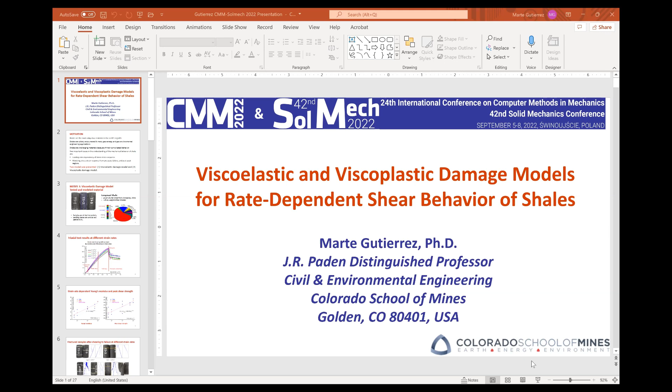My presentation is viscoelastic and viscoplastic damage models for rate-dependent shear behavior of shales. It's a little bit changed in the title from the abstract that I've said. Okay, what are the motivations for my presentation?

Number one is that shales are the most common material on the surface of the Earth. Okay, it's found everywhere. In fact, it's widely encountered in many geoenergy and geoenvironmental applications. At the same time, shales are very challenging materials. They exhibit very complicated, very multifaceted behavior.

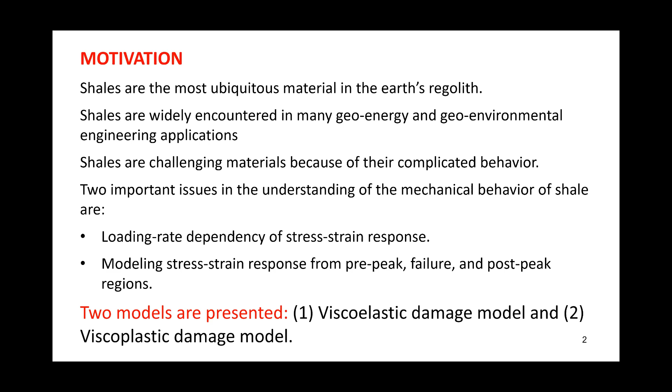Two of the important issues in the understanding of mechanical behavior of shales are the loading rate dependency of the stress-strain response and modeling of stress-strain response that spans the pre-peak, failure, and post-failure regions. So these are the focus of my presentation. And to address these challenges in understanding, I will be presenting two models: a viscoelastic damage model, which is really very simple, and a viscoplastic damage model. And you'll see why there are two models that are being presented.

So for model one, let me present first the results of triaxial tests that were conducted on a shale from China, which is found in Chongqing. It's a lower Silurian shale. Based on mineralogy, 73% of the mineral content are brittle, so it's expected to be a very brittle material. The main component, 55.51% by weight, is quartz, which is a very brittle material.

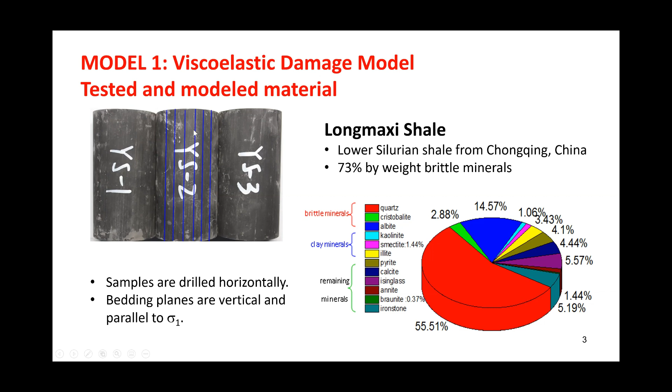The samples were drilled horizontally in the field, which means that the bedding planes are vertical in the sample, and they will be parallel to the sigma sub 1, sigma sub 1 being the vertical stress, the major principal stress. Here's the result of undrained shearing under constant confining pressure of 50 megapascal at different axial strain rates. Note that we have to do undrained shearing because it's impossible to do drained shearing in shales because of their very low permeability.

And at the same time, in this set of testing, pore pressures were not measured, so we'll be talking in terms of total stresses. As you can see, in general, there is an initial compression stage during the loading. This is, by the way, the axial strain versus the deviatoric stress, sigma 1 minus sigma 3, or shear stress. So again, initially, there is an initial compression. This initial compression is due to reloading, closure of the microcracks that were opened during the sampling, during the drilling of the sample. So this initial compression is due to sample disturbance.

So afterwards, we have a more or less elastic stage where there is a linear stress-strain response. And at an axial strain of about 0.6, we can say that the stress-strain curve became distinctly nonlinear. Okay, but still strain hardening. And then after the yield stress, the shales reach a peak. And after the peak, the samples experience very distinct post-peak strain softening behavior. So you can see that this is a very brittle material because of the sudden and very pronounced strain softening.

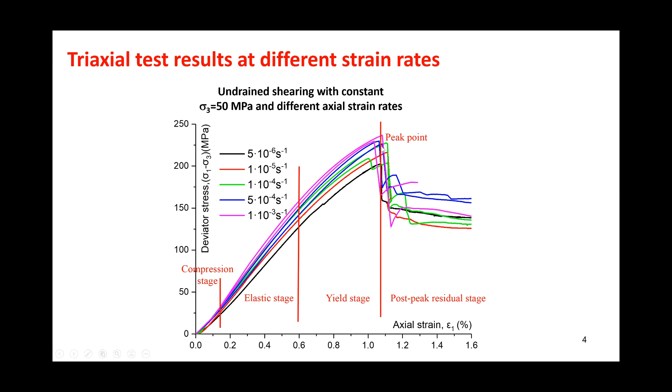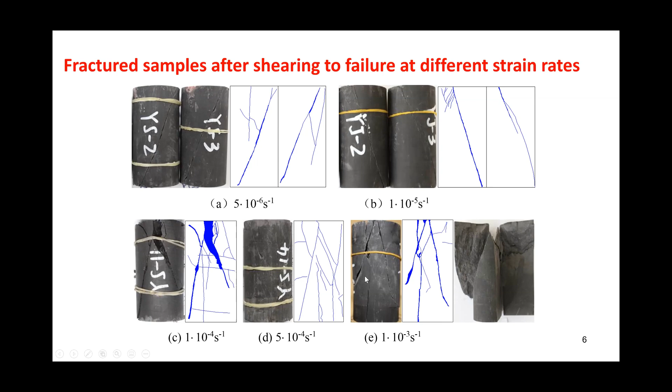Okay, here are the samples after they were sheared. As you can see, the samples exhibited distinct shear fracturing because of the brittle nature. These are the traces of the fractures on both sides of the sample. Okay, but as you can see, as we increase the strain rate, the amount of fracturing increases. There are more fractures at higher strain rate than at lower strain rate.

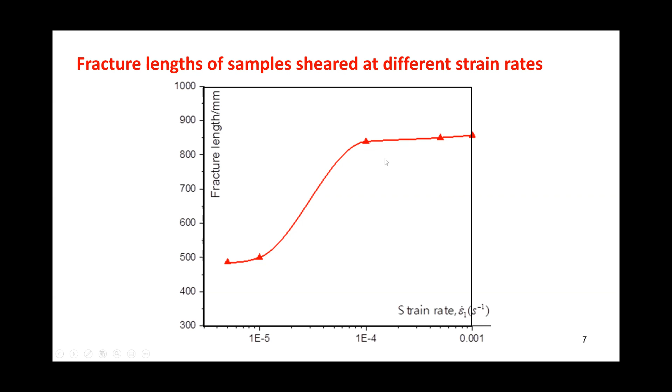And if we plot the fracture lengths of the sample after they've been taken out of the loading cell, you can see that the fracture length increased from about 500 millimeters to about 850 millimeters. So it increases again with increasing strain rate. And the biggest change is between 1 × 10⁻⁵ and 1 × 10⁻⁴. Okay, in order to model this behavior, as you can see, the elastic modulus increases as a power function of the axial strain rate.

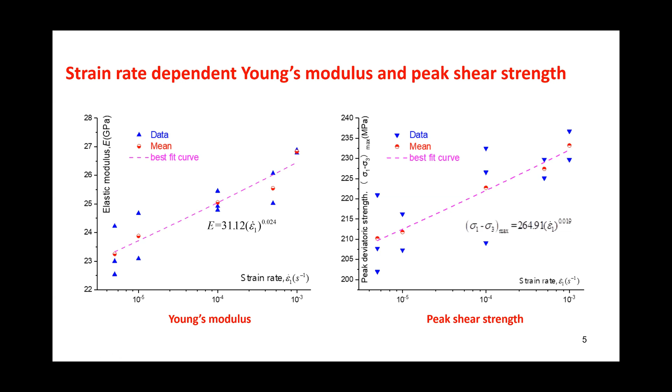So a very simple model is a viscoelastic model, which comprises a static Young's modulus, E sub S, represented here by a spring, and parallel to that is a viscous damper, which represents a strain rate dependent Young's modulus. Since it's parallel, this is just a sum of the two. So our Young's modulus is considered static plus

strain rate dependent Young's modulus to the power of n. And you can see, using the data presented before, the experimental data can be fitted very reliably with this equation, with E sub V equal to 25 gigapascal and E sub S equal to 5 gigapascal. So it's a very good representation.

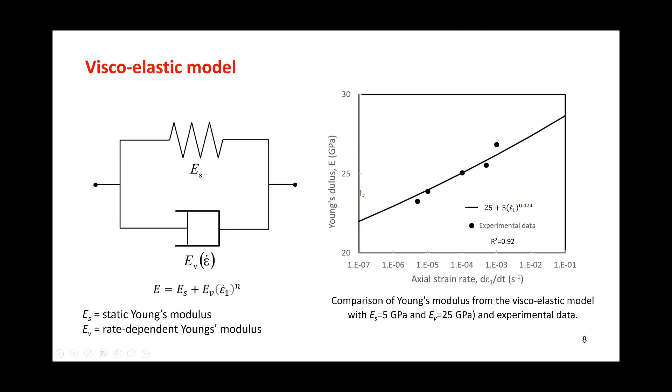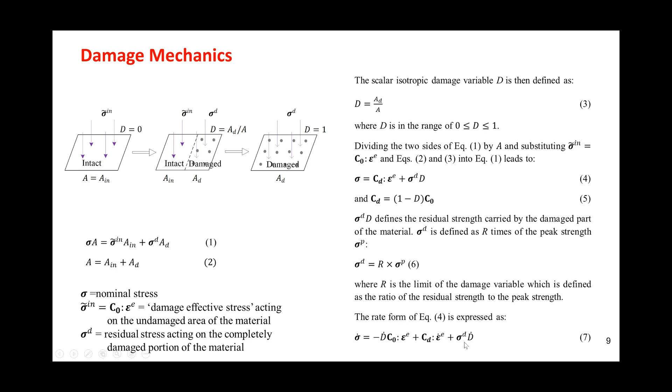If you want, we can prescribe a residual stress. When D is equal to 1, theoretically the stress the material can carry is 0, but we can limit that. Instead of a 0 residual stress, we can make it a multiple of the peak stress. So that's the relation. We take the rate form, divided by time, so we get this stress strain relation. We have the damage rate multiplied by the intact constitutive relation times the elastic strain, the damage constitutive relation times the elastic strain, and the residual stress sigma d times the change in damage.

Damage distribution: how do we represent the volume of damaged material in a material that is undergoing increasing defects? We have to assume that the material already starts with some micro damage, microscopic heterogeneities, and that the activation of these heterogeneities leads to fracture, activation and growth. The fracture activation and growth are actually the damage. So it's reasonable to assume that these initial heterogeneities are statistically distributed, randomly distributed in the sample.

We can relate damage to the length of the induced fracture, and in turn, as shown a while ago, we can relate the fracture length to the axial strain, rather, the total strain. So statistically, if the heterogeneities are initially randomly distributed, we can assume any statistical distribution, and it looks like the Weibull distribution is the best representation.

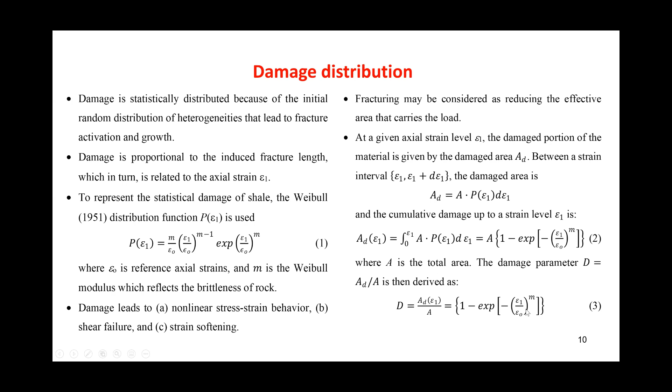Fracturing here may also be considered as reducing the effective area that carries the load. So at a given axial strain, between strains epsilon 1 and epsilon 1 plus d epsilon, the damage area A_D is equal to the total area times the probability of finding a certain length of fracture in the material. Integrating from 0 to epsilon 1, we get A_D equal to A times this quantity, and finally the damage parameter A_D over A is equal to 1 minus exponential of minus (epsilon 1 over epsilon 0) raised to the M. Epsilon 0 again is the reference strain, and M is the Weibull modulus.

Let's do this for the total stress test that I just showed you, under triaxial loading without regard to the pore pressure distribution. Relating intact stress to total stress, intact stress minus the damage should be equal to the total stress. Hooke's law for the undamaged material, where the primes denote the intact or effective materials, is given by this, where sigma 1 is a function of Young's modulus, epsilon 1, plus Poisson's ratio and sigma 2 and sigma 3. Here, mu prime is the Poisson ratio of the intact material, and epsilon 1 is the intact strain.

Substituting equation 1 back into equation 2, we get this relation. A very important assumption in damage mechanics is the so-called Lemaitre equivalence of nominal and effective strain. Both the intact and the total strains are equal, which is a reasonable assumption. So epsilon 1 prime, the intact, is equal to the total or nominal epsilon 1, and epsilon 3 prime is equal to the nominal epsilon 3. So intact is equal to nominal. If we take that ratio, we can also show that the Poisson's ratio for the intact and the nominal material are both equal.

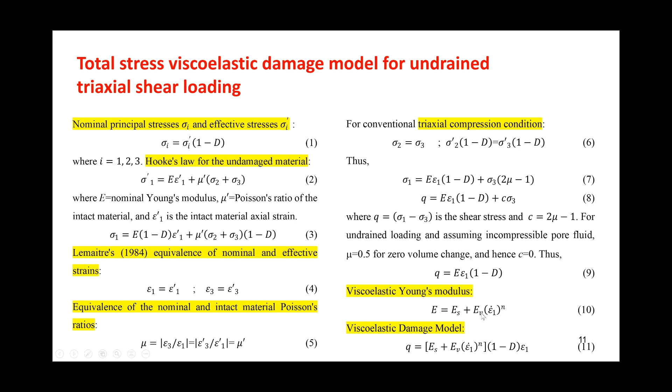Applying the triaxial condition of sigma 2 equal to sigma 3, we have this relationship where Q is the deviatoric stress or the shear stress, which is independent of pore pressure, and C is equal to 2 mu minus 1. For undrained loading, we assume mu is equal to 0.5, an incompressible material. Hence, C is equal to 0, and we have this stress-strain relationship, axial stress versus shear stress. If we use our previous Young's modulus, we can bring it to this equation. We have the static and the rate-dependent Young's modulus multiplied by 1 minus D times E. And the result is a surprisingly simple model.

Now let's move on. One of the things about the model you will notice is that I did not prescribe a shear failure criterion. I did not prescribe it because it is an outcome of the damage formulation. So a shear failure criterion is not required.

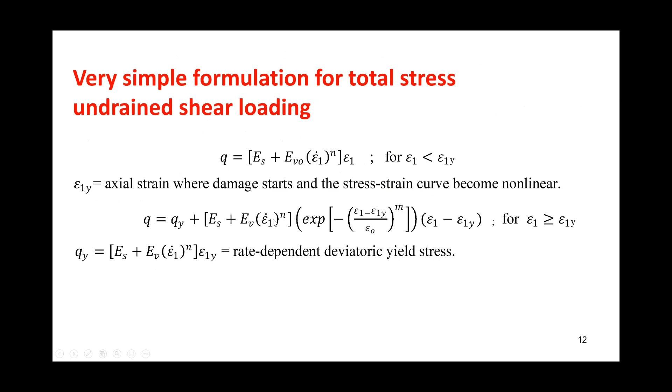If we differentiate this stress-strain relation, the bottom one, Q versus epsilon 1, with respect to epsilon 1, we get this derivative. And if we set this to 0, we get the axial strain at which the peak is going to occur. And the peak is the shear strength. Okay, so we can see that it is constant. The peak at maximum shear stress, Q max, is given by this function only of epsilon y, the reference strain, and the Weibull modulus.

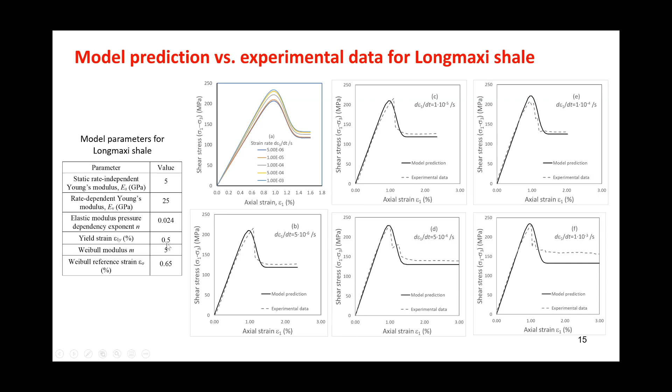And if we put back this shear strain in this derivative, we get a very simple expression for the Q max, which is a function of C, which is again just a function of the constant model parameters, and the static and the strain rate dependent Young's modulus. Substituting all the values from this table, by the way, these are the parameters that are required. We only need 6 parameters to represent the model. Substituting it back, we get this stress-strain relation. These are the experimental points, and you can see the model prediction is excellent with an R squared of 0.99.

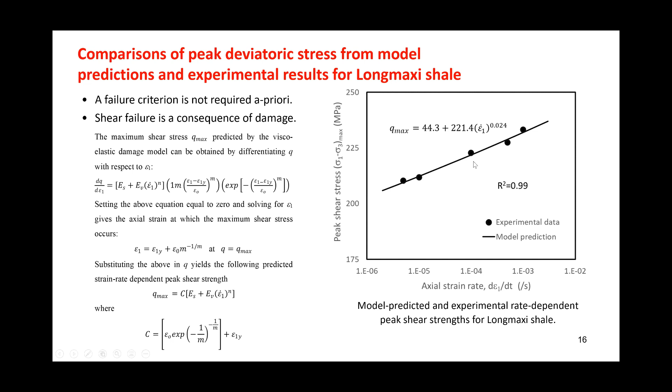So again, the failure was not prescribed, it was not necessary a priori. You don't need it at the start. It's just an outcome of the damage of the material. Okay, so the peak in the stress strain curve is properly predicted. Okay, I'm sorry, I keep on moving to this.

Now let's expand the model to an effective stress viscoelastic model for triaxial shear loading. So now we have a full triaxial loading, but also in terms of effective parameters. Effective means total stress minus pore pressure. Okay, so we use the Cambridge invariants, P and Q, and volumetric strain and shear strain. The elastic stress-strain relation is given by the elastic modulus 3G, and as before, that could be 3G, could be both, could be viscoelastic with a static component and a rate-dependent component.

Okay, so before yielding, we have elastic behavior. After yielding, when we reach Q sub y, then the damage occurs. In this case now, damage is a function of the shear strain, epsilon sub s. It's a function of shear strain. Now we need to formulate as well the volumetric change. The volumetric change is composed of 2 parts: the compression or consolidation volumetric strain and the dilation.

I don't know what's happening.

Okay, and the dilative volumetric strain. So this is the compressive volumetric strain, equal to the change in the mean stress divided by the bulk modulus. And the deviatoric strain is a result of the shear strain increment. We have here the shear stress ratio over P, and eta sub C is equal to the slope of the phase transformation line at which the material changes from contractive to dilative response.

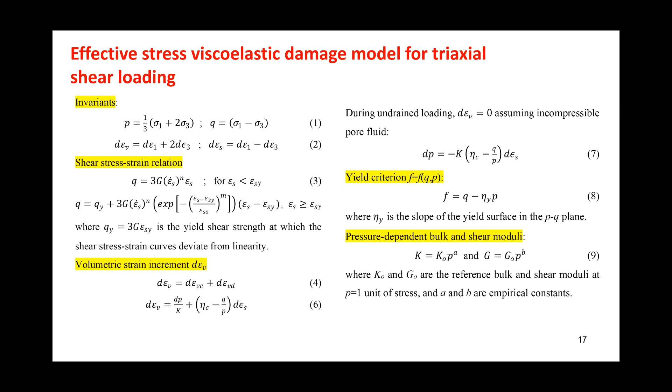Okay, we now also have the yield criterion, because here we only have Q sub Y. So Q sub Y is now a linear function of the mean stress. This is just a straight line function, a Mohr-Coulomb function. We also found that the bulk and the shear moduli are dependent on the mean stress according to the power function given here. So the bulk modulus increases as a power function of P, and the shear modulus also increases as a power of P, with exponent B.

So here's a comparison. We now have more parameters, 8 parameters, I believe: 1, 2, 3, 4, 5, 6, 7, 8 parameters that are needed. This is compared with the results on Pierre shale by Islam and Skalle. Note that there are very few undrained triaxial shear tests on shale with pore pressure measurements. It's very difficult. It takes a long time for the pore pressure to equilibrate in the sample. So these are very good results.

You can see that the stress-strain curves are well represented for different initial confining pressures, 10 megapascal to 20 megapascal. But more remarkably, you can see the very good fit of the effective stress paths in the PQ plane. Again, all are effective stresses. The specimen initially shows contraction, hits the zero dilation line or the phase transformation line, then starts to dilate. Then it strain softens, so it elbows to the right and down a little bit.

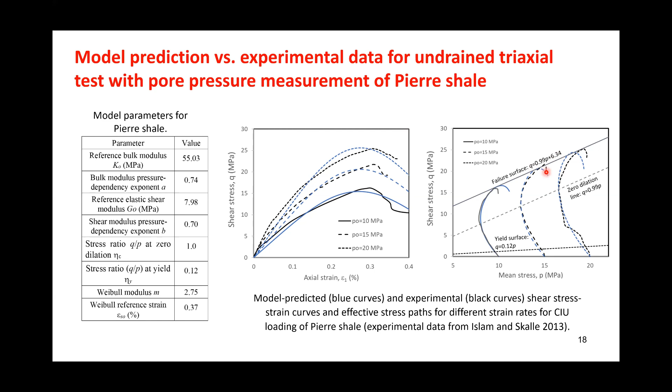The yield surface is linear, as I showed a while ago. The zero dilation line is also a straight line with zero cohesion. And the failure surface from the peak, I can show this to you. This can be predicted by the model as well. This peak failure surface was not prescribed a priori, which is linear. So again, like in the previous model for the total stress, a shear failure criterion is not necessary. It comes out as a result of damage.

I cannot derive a simple analytical model for the shear strength, but we can predict it numerically. This is the model predicted shear failure surface. This is the experimental. And here's a comparison of the experimental and the predicted failure surface. And again, the predictions of the failure surface are excellent, good predictions.

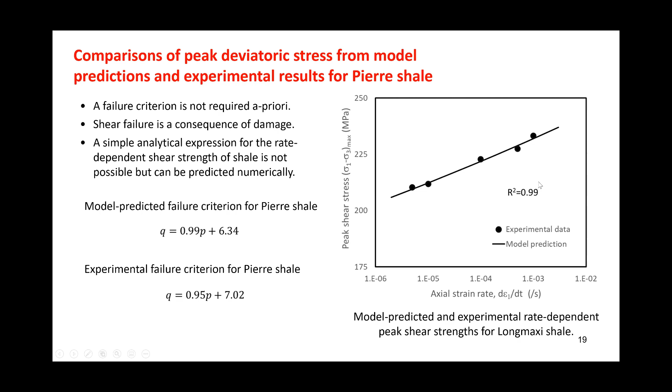Okay. Let's now go to the second model, which is viscoplastic. Why viscoplastic? Well, it is more rigorous than the viscoelastic model, and of course, more complicated as a result. The main thing is that if you add plasticity, then you can also account for inelastic or plastic deformation. You can more rigorously account for the residual shear strength response. And you can show this to be thermodynamically consistent.

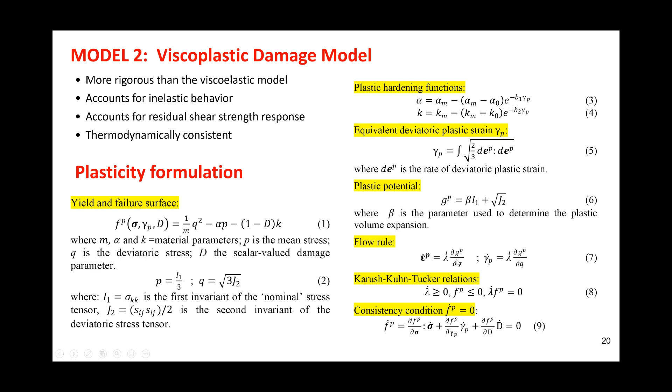And the product of the yield surface and the plastic multiplier should be equal to 0. Then we apply the consistency condition that allows us to solve for the plastic multiplier.

Okay, damage. Damage consists of 2 competing components, a thermodynamic force Y sub D, which is a function of the volumetric strain. So now damage is a function of volumetric strain. In the first model, damage was a function of the axial strain. In the second model, damage was a function of the shear strain. Now the damage is a function of the volumetric strain.

Okay, so again, R sub D is equal to R sub O times 1 minus D. And we again use a damage formulation, which is the same, a Weibull distribution of the damage. Okay, and we come up with this damage rule. There is a beta here to control the amount of damage that we have. So if this is equal to 1, it means you completely go to 0 in your residual stress. But if you have a number less than 1, then you can control the amount of residual damage that you can get, and hence the residual shear stress.

Let's talk about thermodynamic consistency. That's an important component of the model. The internal energy of the material is composed of the strain tensor epsilon, S the entropy, and some internal variables. If we get the time rate of this, we could show that the rate of change in the internal energy is equal to the product of the trace of the stress tensor and the strain rate tensor minus the derivative with respect to the coordinates x_i of the heat flow. Okay, so the work done by the stress multiplied by the strain rate is countered by the change in the heat flow in the material.

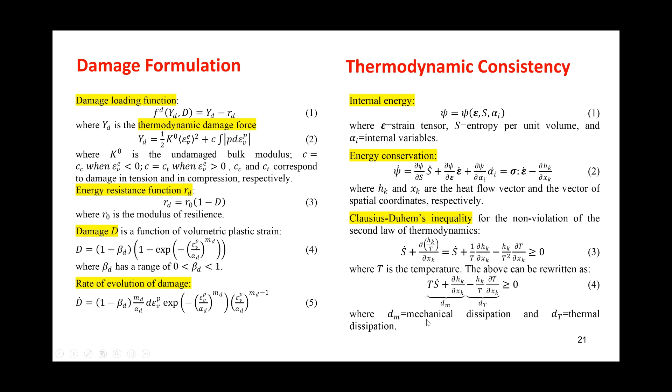We apply the Clausius-Duhem inequality for the non-violation of the second law of thermodynamics. So the rate of the entropy should be equal to the rate of the ratio of the heat flow and the temperature, as a derivative of the coordinates. We can simplify this and it comes up to this. And the sum of all these components should be positive or equal to 0 to be consistent with the second law of thermodynamics. Okay, so we can split the above into the mechanical dissipation, that's the stress and strain dissipation, and the thermal dissipation. Okay, again, so this is the Clausius-Duhem equation, and I'm not going to go through that.

We can also divide the total strain energy, or our internal energy, into an elastic and a plastic component. Okay, so the elastic is a function of the total and the plastic strain, and the plastic is just a function of the damage and then some internal variable. The elastic energy is given by this, the damaged material multiplied by the elastic strain, which is the difference between total and plastic strain. We could show that the derivative of the strain energy with respect to the elastic strain gives us the stress, and that should be a product of the damage constitutive relation and the elastic strain.

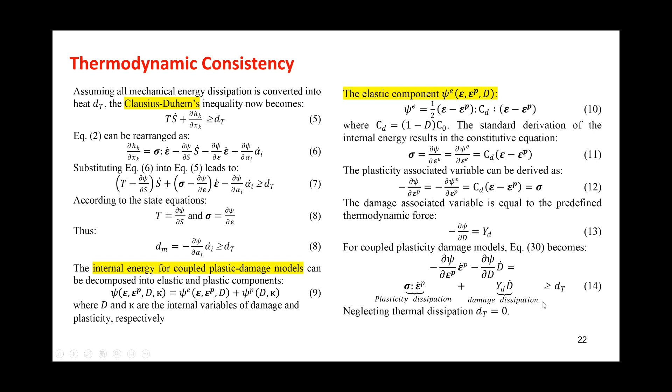Okay, so at the end of the day, we derive this equation. So the rate of work of the material, the change in strain energy due to plastic deformation, and the change in strain energy due to the change in damage should be equal to the thermal dissipation. So this is the work done by the material due to plastic deformation. And this is the work done by the material due to the change of damage. So we have two: plasticity dissipation and damage dissipation. And since the sample is very small and it is very difficult to detect thermal changes, we can just assume that the temperature change is equal to 0. Okay, all right. These are the important things to note about the thermodynamic consistency of the material.

We can see that the damage dissipation, which is a function of the damage force times the rate of the damage parameter, is always greater than 0, because the thermodynamic force is positive and the damage rate is non-negative. D is always increasing. The plasticity equation, the product of the trace of the stress tensor and the plastic strain rate, is always non-negative for 3 conditions. We have an associative flow rule, a convex yield or failure surface, and use of normal flow rules.

Okay, those are the three. However, as is assumed in the model, it is non-associative, so we already violate this. So we have a non-associative flow rule. The product of the stress tensor and the gradient of the plastic potential can be negative. So in this case, we cannot avoid negative dissipation.

But this is the same as all other models out there with non-associative flow rules. All models with non-associative flow rules do not satisfy the thermodynamical law. So we can have negative plastic energy dissipation. What is the impact of the negative energy dissipation for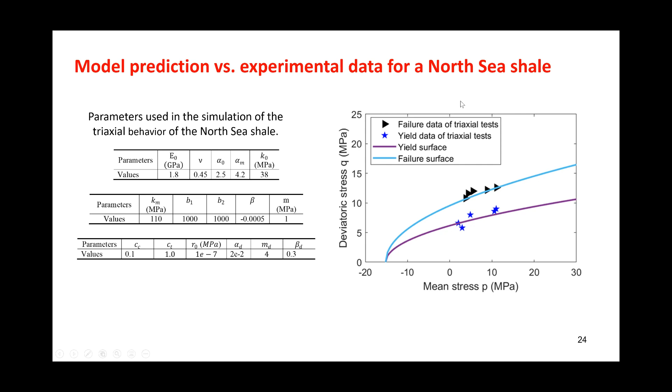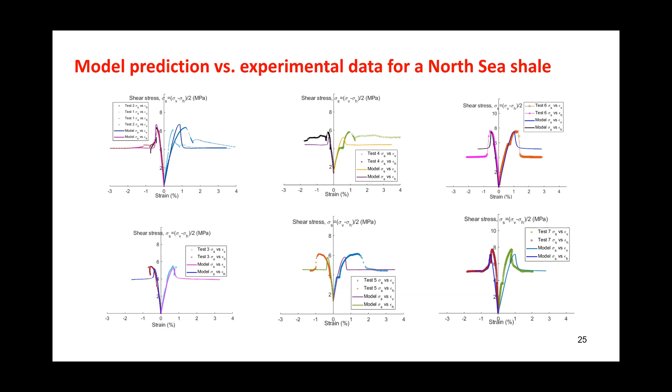And here's a comparison of the predictions of the model versus the experimental results for 6 tests of different stress paths. Some are extensional, some are compressive, all of them are drained. Some of them are with sigma parallel to the bedding plane or perpendicular to the bedding plane. In general, though, the trend is well represented.

All right, so let me conclude. I have presented 2 models, viscoelastic and viscoplastic damage models for strain rate dependent shear behavior of shale. Both models use damage as represented by a Weibull distribution function based on an initially random distribution of heterogeneities in the shale to model damage by fracture initiation and growth. So increased fracture length means increased damage area or reduced load.

In the very simple viscoelastic model, damage accounted for the nonlinear stress strain behavior, shear failure, and strain softening. All of them are accounted for by the model. A failure surface was not needed. It's not necessary a priori, but it's simply a consequence of the damage. The viscoplastic model accounts for inelastic strain, unlike the viscoelastic model. And again, damage accounts for strain softening.

The viscoplastic model was shown to be thermodynamically consistent, showing positive energy dissipation for associative flow and potentially negative energy dissipation for a non-associative flow, like all constitutive models out there with a non-associative flow rule. However, damage has a stabilizing effect and opposes the negative work that is done by the plastic deformation for non-associated flow. I've shown several comparisons of the model predictions with the experimental data, and you can see that the fits with the three shales, Longmaxi, Pierre, and North Sea shales, are satisfactorily predicted by the model. The models perform extremely well, I believe.